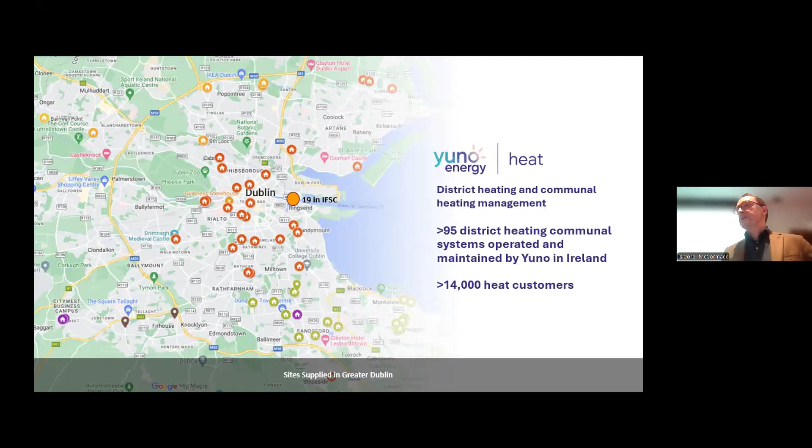It's not exactly district heating, but these are the type of buildings that would be easy to connect to district heating. So there's 19, let's say, in the IFSC area of Dublin, and they're all district heating enabled for the Dublin district heating system when it gets built.

So my background - never heard of district heating in 2007, joined RPS to design landfills. And they said, you're going to actually work on this project in Dublin called district heating, and it's to do with the waste to energy plant.

So I did that for 4 years, and then moved to Denmark. And within a month of moving to Copenhagen, I was sent to Kiev, and I was working on district heating systems throughout Eastern Europe. That was the start of it - EBRD, EIB, EU projects to rehabilitate district heating systems.

The Soviet Union had district heating as its supply of heat - centrally designed, every city was pretty much the same energy centre, with pipes going out to the different apartment blocks. All the apartment blocks look the same. If you fly over an Eastern European city, you'll notice the buildings from the sky - you can tell which is a hospital, which is a school, where the apartment blocks are. It was really a massive central design.

So we were sent in to do feasibility studies and then design and build tenders for rehabilitation of existing systems and to try and improve those systems. I worked in Kazakhstan, Ukraine and Belarus, did some work in Croatia - a lot of different experiences from that.

And then I was in the US to work on decarbonisation projects. They have a lot of steam systems in the US, from army campuses, university campuses, pharmaceutical campuses, and they were looking to decarbonise their sites. We were putting in hot water systems over there, looking at how you could decarbonise their thermal generation that way.

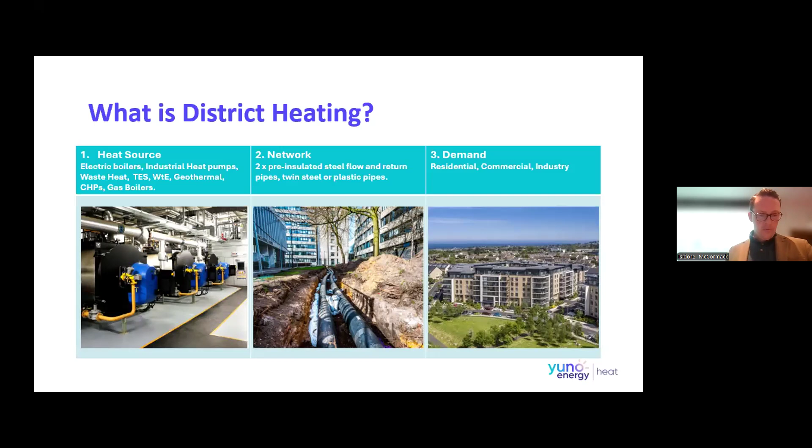So that is district heating at a high level.

But why is district heating important in Ireland, and why is it being used across Europe? There are a lot of points here - energy efficiency has environmental benefits, cost savings. It can provide energy security and resilience because we're using locally produced heat and bringing it to homes rather than importing fossil fuels. And it allows flexibility and scaling.

You'll get the slide decks after the talk, but these are the two areas I'd like to look at more: where does district heating support the electric grid, and how does it utilize local energy sources, and how is it beneficial from that perspective?

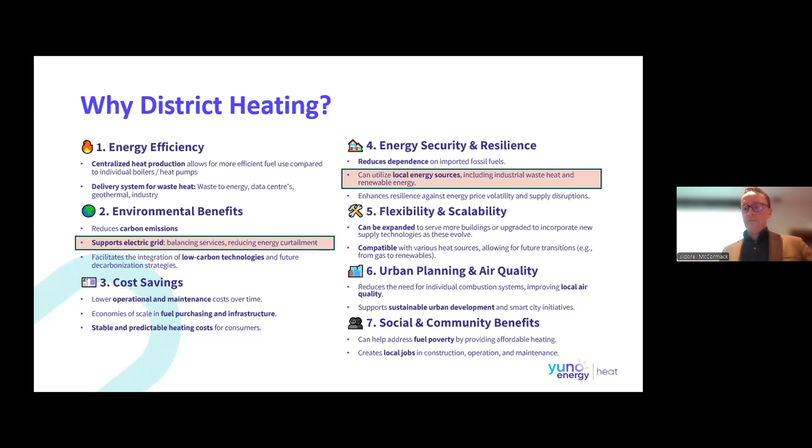District heating can utilize local energy sources, including waste heat from industry and other sectors. Integrating electricity, heating, cooling, and transport on the demand and supply sides is called sector coupling - a phrase used a lot in Denmark, and I've heard it here since I've come back. It's a key strategy to achieving a low carbon, integrated energy system and meeting growing energy demand, looking at where you can share benefits between energy generation and supply.

It also provides the opportunity for innovative business models and consumer choices. I'll go into that a little bit.

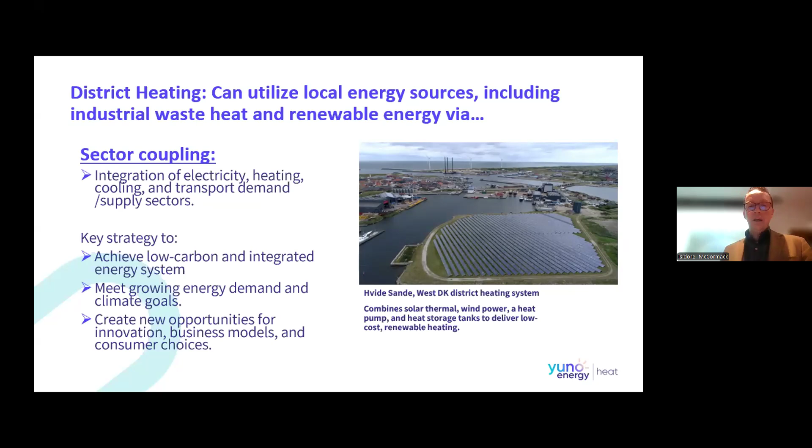The photograph is from Hvide Sande in West Denmark, and that system combines a district heating system bringing in solar thermal, wind power, and a heat pump, with storage. It's quite an integrated system to deliver heat. I'll go through a couple more examples of sector coupling.

It's not regulated the same way as heat, and it's not a not-for-profit business - it's a commercial enterprise, based on them being able to sell cooling to commercial premises that see a benefit in taking it on, both commercial and financial.

They're able to take cooling from the sea and pump it to hotels and offices in downtown Copenhagen. The hotels noticed they could take their cooling equipment off the rooftops and make gardens up there, beer gardens and things like that. They also got efficiency, because the system was 80% efficient in terms of cooling using the water from the sea.

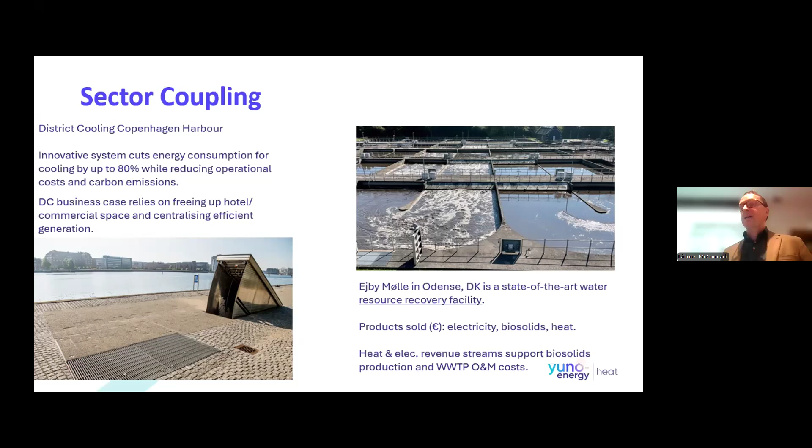We do electricity in Ireland, Irish Water does that. They make electricity, and if they have it, they put it in the grid, and they use some of the heat in their wastewater treatment plants, but they don't get any revenue from that. I saw lots of examples in Denmark where if the district heating system was there, they could avail of it and use it to generate another revenue stream of something that hadn't been thought of before.

It has multiple uses, I suppose, is the takeaway there. Sector coupling - this is a project in Tårnby, and it's super interesting because there was no district heating in this area by the airport, and there was a wastewater treatment plant, and then there was a new area newly zoned for commercial premises. They put an aquarium there, a few things, but it was quite an industrial area previously, and there was an idea to use the heat from the wastewater treatment plant.

So they put in a heat pump and send the heat to the district heating system that supplies the hotels and the industrial park. Then they take the cooling out of the other side of the heat pump and send it in the cooling network to the commercial premises. So they're simultaneously producing heat and cooling, using both sides of the heat pump, which makes it very efficient.

Then they have an ATES, which is an aquifer thermal energy storage system. That park area is covered in boreholes, and in the summertime they're generating the cooling, and the heat coming out of the other side of the heat pump is pumped into the ground. Then in the wintertime they take that heat out, and the excess cooling goes back in to recharge the ATES. So the ATES operates like an enclosed aquifer storing the heat, and the heat pump uses that to keep an efficient system.

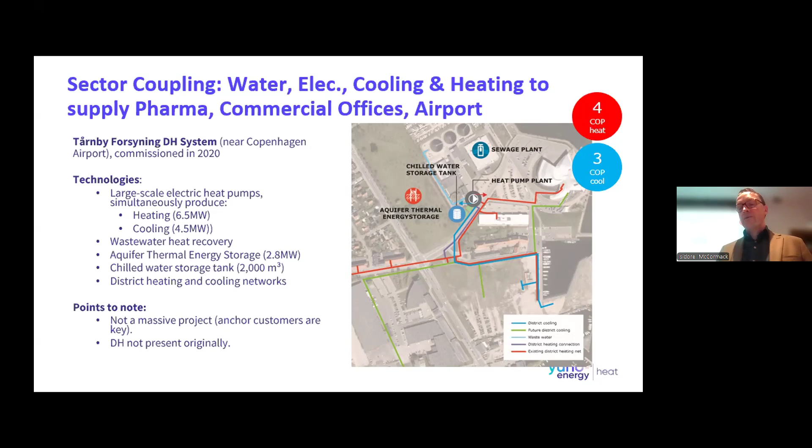The Tallaght district heating system takes waste heat from Amazon and delivers it to South Dublin County Council's offices, the university, and an apartment block now, most recently. But it has potential to scale as well, to put in more components and build on it. That, I suppose, is a good template for us to look at and say, okay, this is something maybe we could build on. I think I read today there's 82 data centers in Ireland - I know there's 67 around the M50.

The electrical demand of a data center is equivalent to the thermal output. So think about it - these things are monsters. I didn't really know a whole lot about data centers before I came home to Ireland, but they have a huge electrical demand, and I suppose that's what we hear about on the radio all the time. But the output is just put into the air.

That's why a lot of the planning conditions are for district heating to be connected to them if a district heating system exists. But it is something that if we continue to have data centers, and we already have quite a lot, it's something that could be used to replace natural gas, like the Danes use waste-to-energy plants to fuel a lot of their district heating in the 90s. It could be something we look at and say, okay, this is a tool or a benefit that we have, and we should use it to decarbonise our heat. How do we best access that and use it? But at least we have a template of something that's already been done in the Tallaght system, and it's to replicate that and interconnect them.

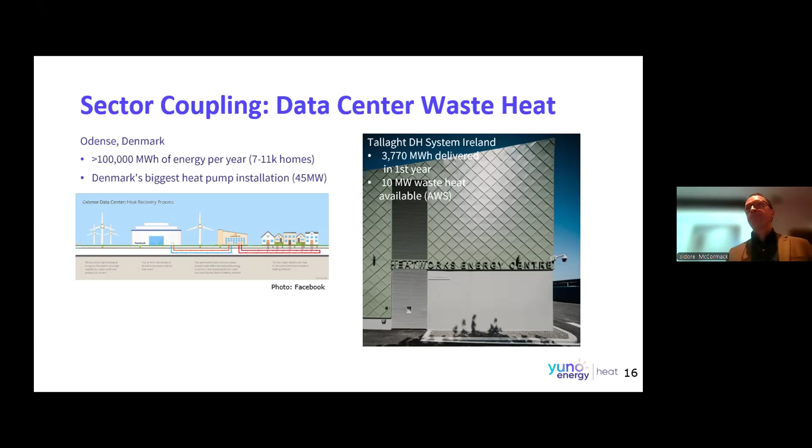With this potential to store hot water, you can reduce curtailment of renewables. If there's excess wind or solar, as we're more than likely going to get as we integrate more into the system, you can store it in the thermal system and then use it to generate heat, reducing peak electrical demand and offsetting the generation needed at that time.

Today, when we get to peak generation in the wintertime, we still use Moneypoint and the coal that goes into it. As we get more data centers, electric vehicles, or more heat pumps - which is the target - we need more electricity. We are getting more turbines, but at peaks we're still going to be using Moneypoint in the near future. That's where we have to start thinking differently about our whole energy system and where we can move the energy demand. District heating is a tool that allows for that.

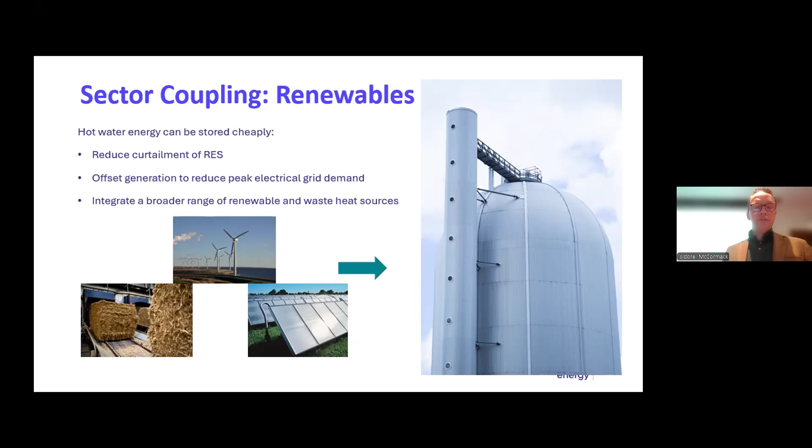Sometimes they can't predict that, so it can be quite costly. Next year it's forecast to be 3.5 cents per kilowatt hour on our bills. Just to break down what that means - I think I'm paying 30 cents at the moment per kilowatt hour, so it'll be 33.5 cents next year because of this.

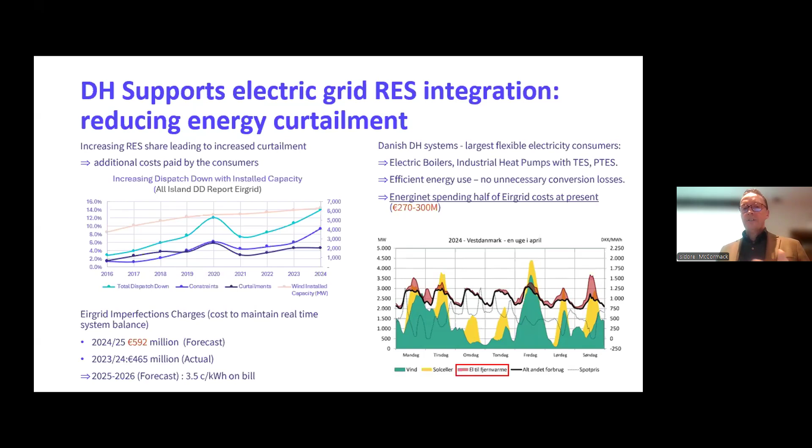So at scale, this is a very useful system to curtail energy, store it, and use it when you need it. And this is another example to take as well in terms of balancing services that it can add. These are ancillary services when you've got noise on the grid or some disturbance where there's more generation or more demand than expected. They employ ancillary services at a grid level to help filter the noise, restore the frequency, and stabilize the grid.

So there's very, very fast millisecond response times required for that. And the Danes use electric boilers connected to the district heating system to do that. The chart on the right just shows the planning that West Denmark, where it has an awful lot of wind, there's two grids, west and east, and this is the west grid. They are planning to use electric boilers, which have a very fast response time. Heat pumps also have a very fast response time.

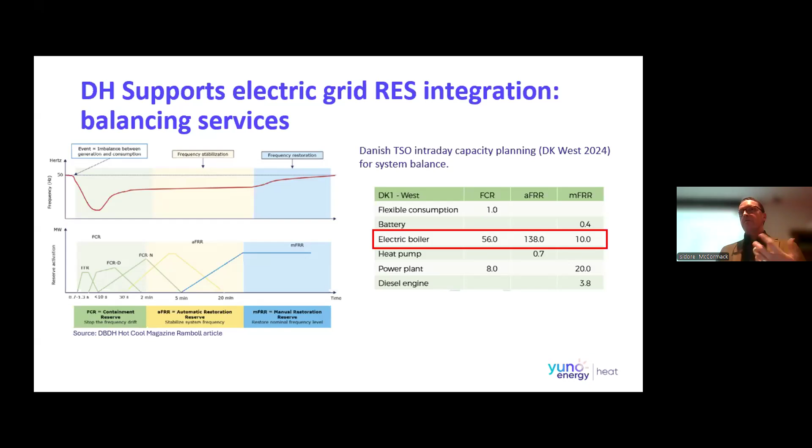And the benefit here is that they're a centralized customer that you can switch off, switch down. It's not like if you have a heat pump at every home, where they don't have control over that. So that's a strong benefit in terms of an infrastructure that's there, so you're not paying more for it. I've worked on some projects where they're developing ancillary services, innovation approaches just for this market. But what the Danes already have is a heat market that's decarbonising their heat, and they can use it to balance their grid. So the costs are lower.

So, yeah. Then I want to talk a little bit about who else is using district heating to decarbonise heat. I suppose I'll talk a bit about what we're doing in Ireland, but this also gives a perspective as to why district heating is being looked at differently across Europe at the moment.

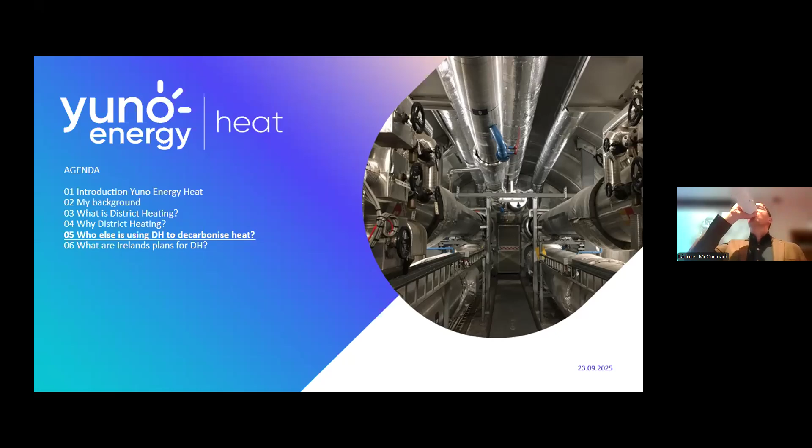But the zoning legislation, as I mentioned before, when it's in place, the idea is that if you're in a mandated area and you have over 100,000 megawatt hour demand per annum, you're mandated to connect. And that, when you look at the viability of a district heating system, you have to have your heat source, you have to have your network, and you have to have someone to take the heat.

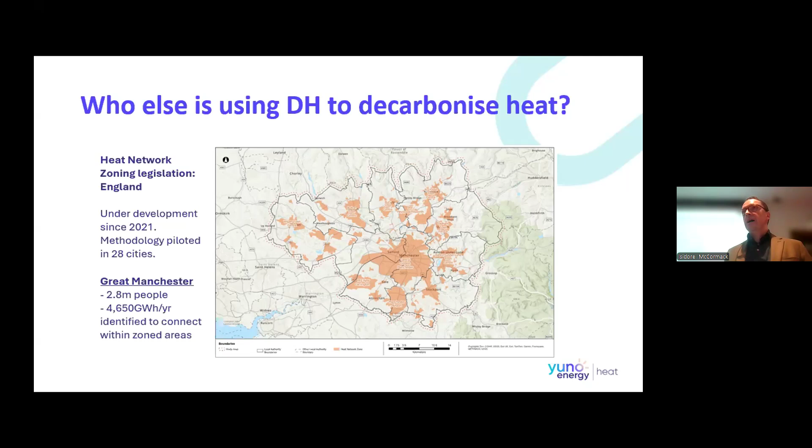And the consumer risk is always there, that you don't know whether they'll actually take the heat until you knock on their door and say, well, we've built the pipe, would you like some heat? So the English are trying to remove that by mandating that connection, so you have a revenue stream once you've built your district heating system.

They've been doing that project since 2021, but in absence of legislation, since their Heat Network Act came in 2021. The Scots have been quite progressive in developing district heating and figuring out where they could use it. The secondary legislation, giving them a legal framework for regulation, licensing, and zoning heat networks, is apparently coming in this year. But it's built, and it's a very nice looking building, as you can see there. It was quite a pioneering project, putting in a heat pump at the Clyde.

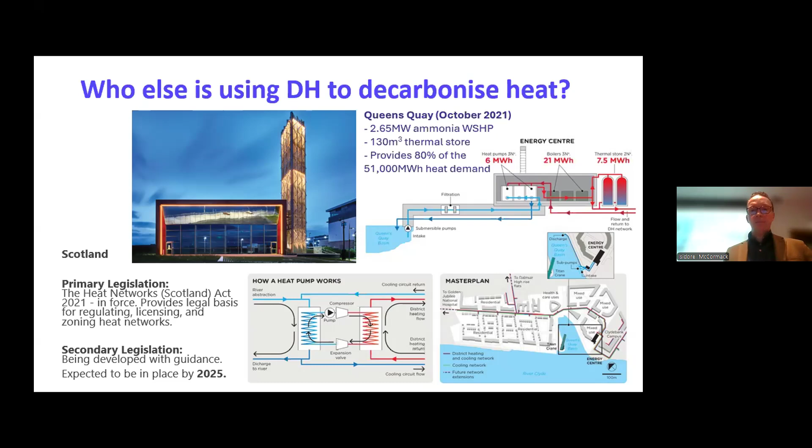So then I would like to talk a little bit about Ireland's plans.

In 2022, SEAI did a heating and cooling study, quite a comprehensive study with multiple reports. It identified excessive dependence on fossil fuels in Ireland, and an urgency to deliver climate targets using available technology as quickly as we can. District heating and heat pumps could play a vital role in Ireland decarbonising fast. One of the biggest takeaways was that over 50% of Ireland's heat demand could be supplied by district heating.

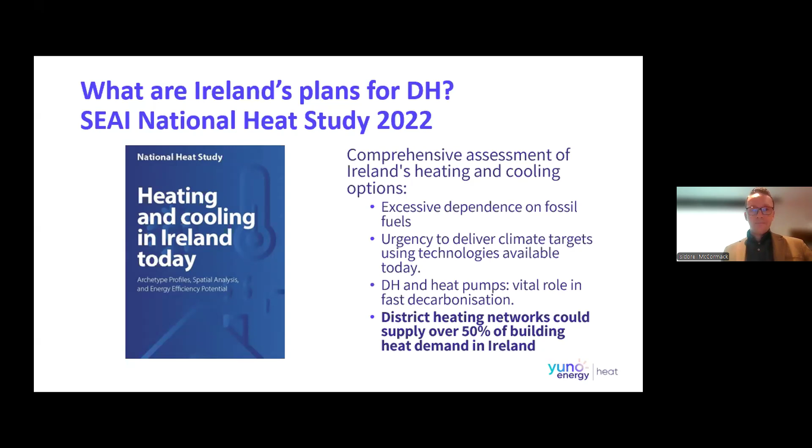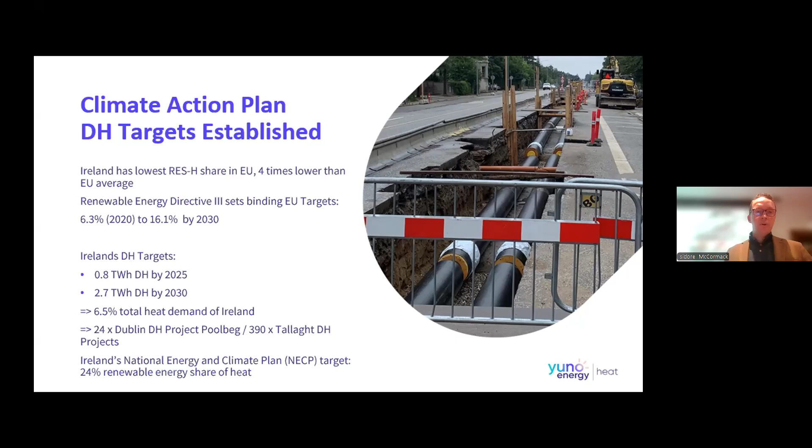But we are making progress. SEAI established the Centre of Excellence in 2024 to provide assistance developing district heating for the public, private and semi-state sectors, and to encourage and promote district heating. They are being well resourced and are progressing, and it's great to see that.

In terms of timeline, there was a draft heat bill in November last year, and the programme for government called out that the government would enact legislation in '25 to accelerate the rollout of district heating systems. So they've put this target in front of them for this year to get that draft heads of bill into legislation. In June it went for public consultation, which closed in July.

On July 17th, they announced €5 million for developing projects to be shovel ready. This is the first time they've really said we're going to fund district heating in some significant way and put money towards development of projects.

The National Development Plan has, I think, 500 million to fund projects to mitigate climate change, and district heating is one of those, along with offshore wind. The exact pot for district heating hasn't been announced yet, but they will hopefully fund district heating projects - the funding of the sector is really needed to develop it further and at speed.